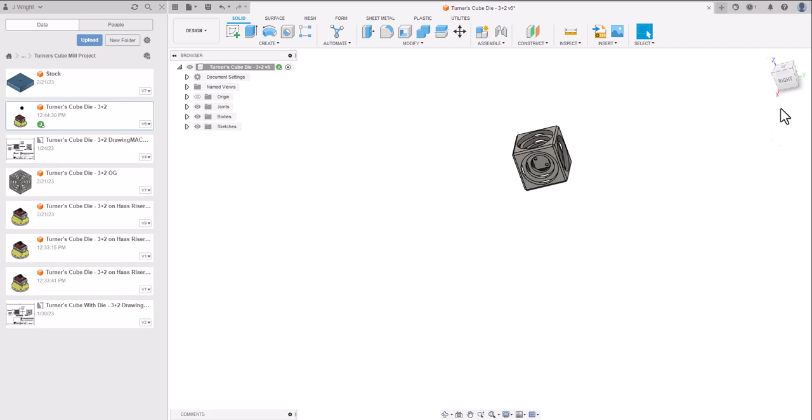All right, so what I want to do is I've got this model already created here, and I want to machine it on a multi-axis, something like a UMC 750 or 500. I'm going to go ahead and rotate this up to the top so that I've got my top up, I'll just go a long way around to get it.

I'm going to set, you can see over here I've got a piece of stock, that's really just the extra stock. I'm going to start with a piece of 2 inch by 2 inch square stock, and make it a little bit longer, that way I've got something to grip into in the vise. The way I plan to run this, put it in the vise on the riser with the additional stock underneath it, face mill off the top of it. I'll give you a couple of options of either face milling all 5 sides of it or milling around the outside of it, doing a couple different things like that.

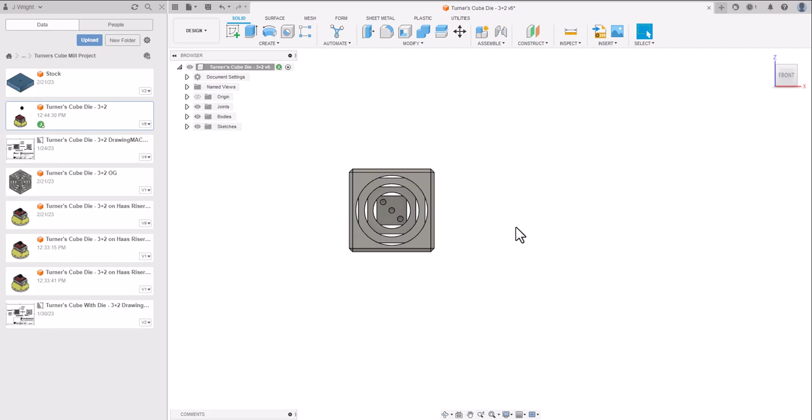But we need to get this additional stock put on the bottom of our part. So we're going to take this, skew it just a little bit. We've got this stock, all this is, I'll drag it in here and you can see it a little bit better maybe.

It actually says stock to be removed. I'm going to move it down. It is just a piece 1.85 by 1.85, that's the small side of this. This would be just this bottom area here, it's 3/8 of an inch long, and I just want to attach it to the bottom of our part.

So I'm going to take it and I will go from the center of it, and I went ahead and put a little point right in the middle of the part, just so it's a little bit easier to find its home.

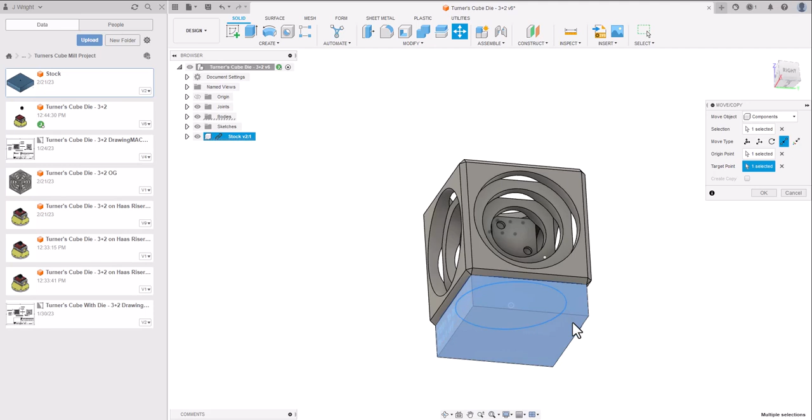And now it's attached to the bottom, and at this point it's good to go. It's got just this piece here, and again this blue piece is all going to be removed after the fact. So at this point I've got my part that I'm going to be machining, then I've got my smaller piece that's going to be removed later on.

I'm going to go ahead and do a file save on this, and actually I'm going to rename it just so I don't mess up some of my other stuff that's out there. I'm going to call it 3+2 video one. I'll save that. So I still need to go ahead and get it put on the riser, so I'll do that next.

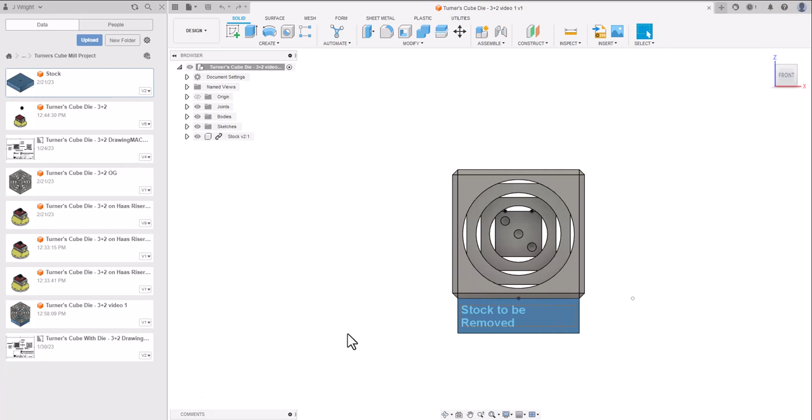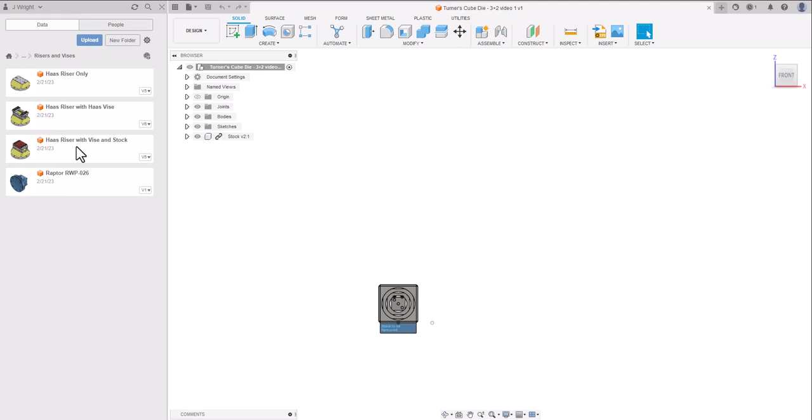So let's see, got that saved, I'll bring in my riser. This is just going to be my riser with the stock but no part on it. So what I'm going to do is I'm going to go back into my 135 folder. I've got a folder I created called risers and vises. I'm going to grab my riser with vise and stock, just going to drag it over here. Give it a second to populate.

Now, I did some work on these before, I'll put these in the modules for you guys. This was an import that I took off of Haas's webpage, and I did a little bit of work to it just to make it a little bit easier to work with. And then I had it in some assemblies, and then I disconnected it from the assemblies, and then I made it one big giant component. So I have played around a little bit with it, and I'll show you how to do that too as we go.

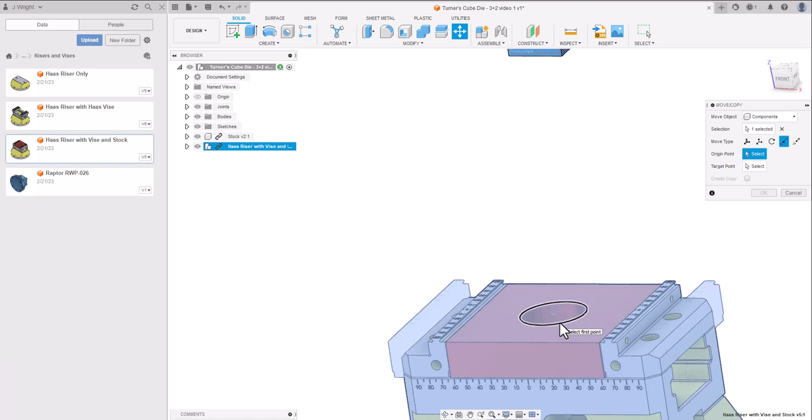So we're going to take this guy here, this selected component, and we're going to go from the center here, if I can get pulled up to it. So from right there, and we're going to go up to the bottom of this blue part right here, and then we'll hit OK.

And we'll get a front view of it again. Pan down a little bit and get out of that.

Now we've got our block in the middle of our part. What I have here is just the vise, and I didn't take the time to move the jaws in so it would actually fit, but I drew just a solid here. It's got a hole in it, and it really simulates some vise jaws that we had from a previous job. At this point, I've really got my part ready to do the things I need to do. I'll go ahead and do a save here, just because I've gotten this far. I don't want to lose what I've got.

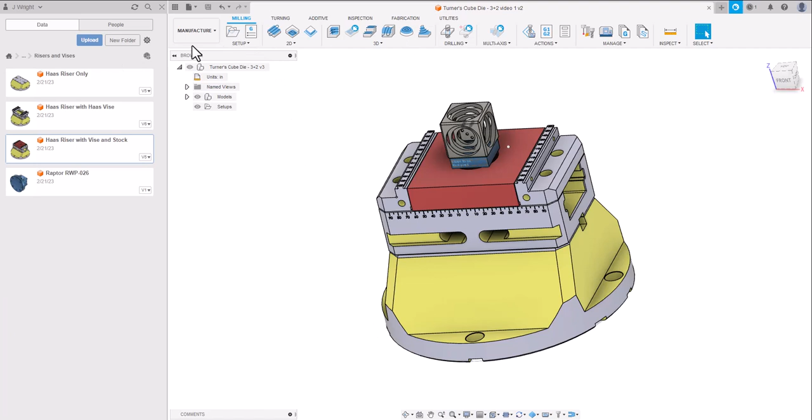So now I'll go ahead and go on into my Manufacture, and I want to work top to bottom, left to right, to get my setup going. Now it immediately sees all of this as one giant unit. That is not what I want to machine.

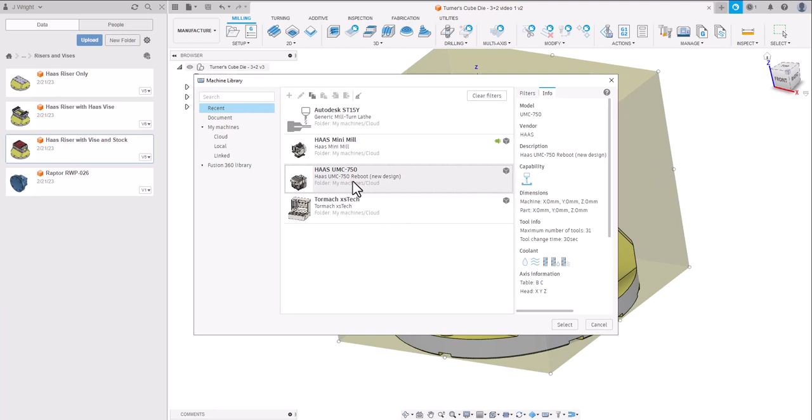So I want to go in and start at the top, select my machine, get all the things that I don't want going on, get those out of the way. I'm going to pick the UMC 750.

Trihedrons up there at the top, that's fine. And then I'm going to set, let's see, let's go back, and we will set either by this model - we can either go from a solid, we can pick my orientation, I can pick how I want things to work through here.

I can also then choose here what is going to be a fixture. Well, all of this underneath here is part of the fixture. So let's see if we can just drag it up. Nope. So we'll just go in and drag, or highlight, all of these components that make up the fixture. Should be everything - I deleted out some of the stuff inside of there. I'm going to go ahead and hit OK on that.

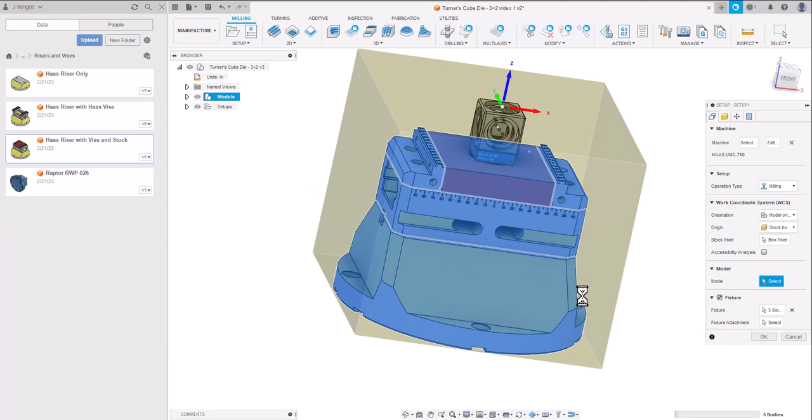I'm going to come back to it in just a second. I want to save what I've got. Okay, so save. I'm going to go back into my setup.

And so now I really want to make sure that this thing knows what it is that I want to machine. All I want to machine is that. Now I didn't choose to show the stock on it - I can if I want to. So there's my part.

I can also do, let's go from a fixed size box, and I can have that box be - I think that stock is 2x2. And it's definitely not that deep. In Z, it's probably 2x2. Let's go 2x2x2.

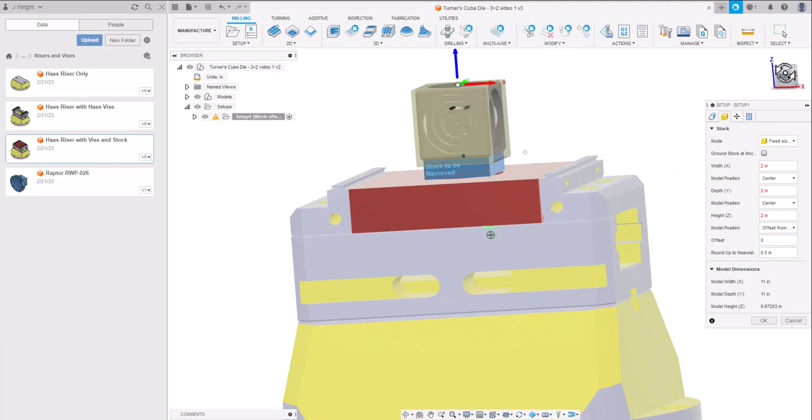And these off the top - no, that's not going to work. Offset of 0, bring it back up to the top there. Probably I better leave a little bit on the top. So probably better give it 75 thousandths offset for the top.

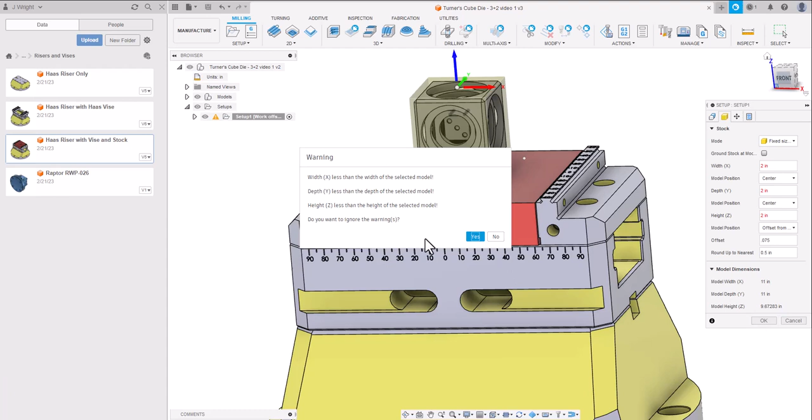Not sure, I've got room in those 2-inch sections. Okay, so I'll leave that alone as of now. That way I've got some stock that I'm actually going to show cutting. I'll probably have to go back and do a little bit of work on that in a bit, but I'll leave it alone for right now. Do a save on it.

And go ahead and shoot to a top view. I'm going to start off with a face mill pass, and skew it up just a little bit. So I want to use a 2-inch shell mill - it's really an insertable shoulder mill.

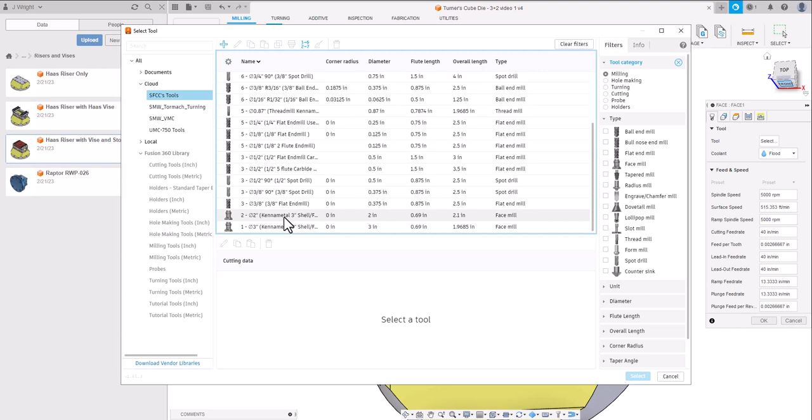So if you don't already have one, go ahead and create one. And if you don't know how to create one, I've pulled one up. I go back into it. You can take an existing tool, or you can go into Fusion and create a tool that's already there. So I'm going to go into this one and edit it, because I see it says 3-inch shell mill here, so I'm going to change it.

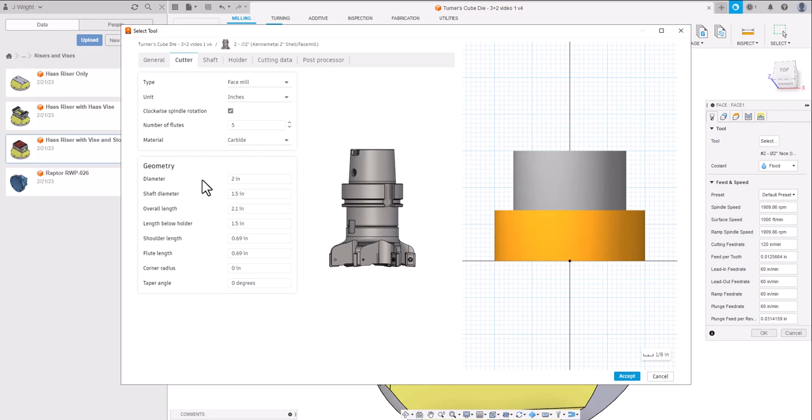It is a Kennametal, but it's a 2-inch, and my suspicion is that the body on it could just be a little bit longer. Let's see if I can get a little bit of holder help.

Maybe not. Okay, this has some projection on it. Probably not going to be really what I want. We'll try it, see what it looks like. Yeah, it's not quite what I want. Let's see, I really need to stay in that Cat 40 style.

Let's see what something like this looks like. Now, those are all going to be kind of oddball holders. But I do need to get a little bit more length on it.

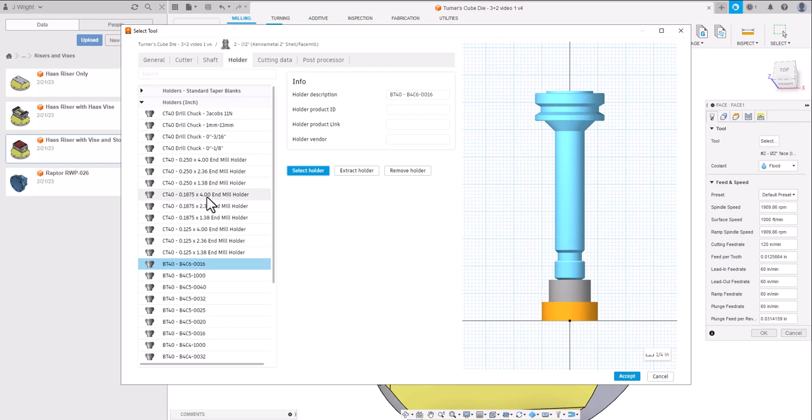That'll give me, let's just say I go with something that's got 4 inches of stretch on it. It's not going to be quite true to form, but it's going to give me a little bit better idea of what I need to have for tool extensions.

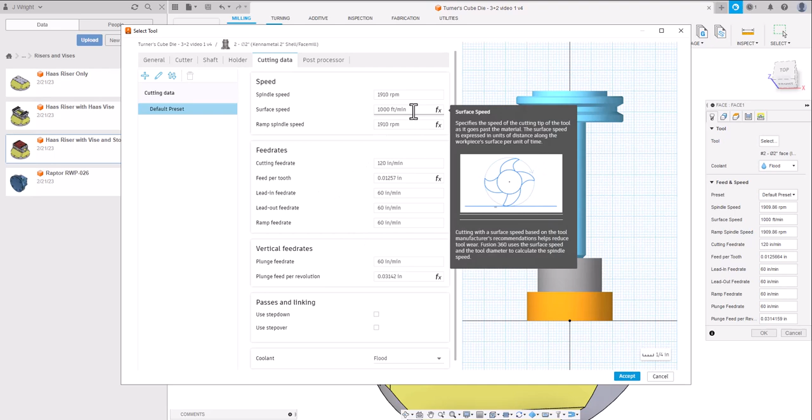I already set this one up earlier with 1,000 surface feet per minute and then feed per tooth, 5 teeth on this cutter, and I've got about a 12 thousandths chip load, so I'm going to be feeding about 120 inches a minute.

It's going to be tool 2 because our probes are set into pot 1. Alright, so I'm going to accept that tool, and we're just going to have to know that it's not an exact true to form tool, but it is something that gives us just a little bit of distance. And depending on how we machine this, it's not really going to make that much difference.

Obviously, this is a really long tool to use. Okay, so let's go ahead and do some machining on it. And that is the surface that I want to cut.

So we'll go right to here, and we're going to do a face mill. Should have chose face mill first. Let me back up here. I don't want that, I do want face.

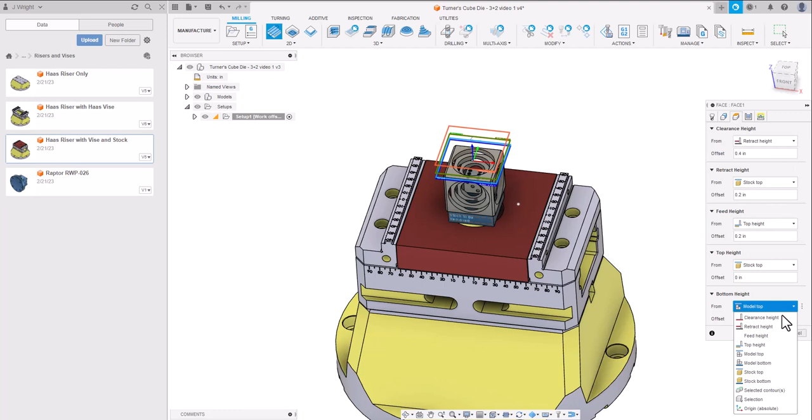And I'm going to select this face. And I really want to make sure that it goes all the way across. Not a huge fan of that radial moving out. There's my face I want to cut.

And I want to go right down through the middle, so I'm going to do a step over of 2 inches. Pass direction probably doesn't matter much here, and probably don't need to worry about stock to leave. I can change my vertical lead in and lead out if I want to. I'll leave it alone for right now, and we'll see what it looks like.

So it just barely comes off of it. And it's okay as long as everything is awesome. And we'll change our pass extension to be about 1 inch, 250 thousandths. We'll leave the radial up and down on it, but it'll extend out just a little bit more on that.

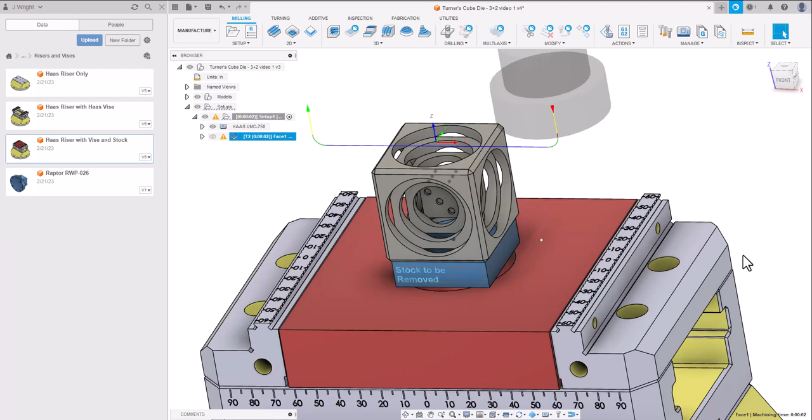So as of now, I'll go ahead and do just a simulation on it. And I think since I have Camtasia going, and Fusion, that's why I'm having so many problems with running this thing through here. So it may be a little jerky as it goes through.

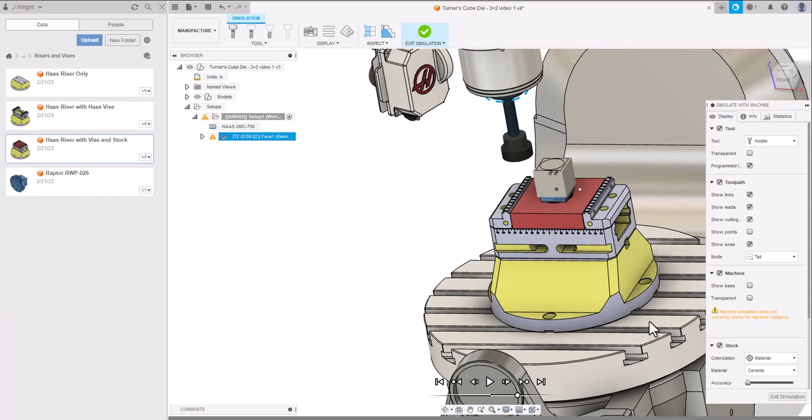All right, that's not bad. So by having the machine base turned off, it's only going to show me really what matters at this point. So I can exit the simulation, go back, straighten things back up again, get everything kind of back into view. I can get rid of this waffle section because it's not really necessary for me anymore.

I don't think I'll be needing it. I hope to not need it. All right, go ahead and do a file save.

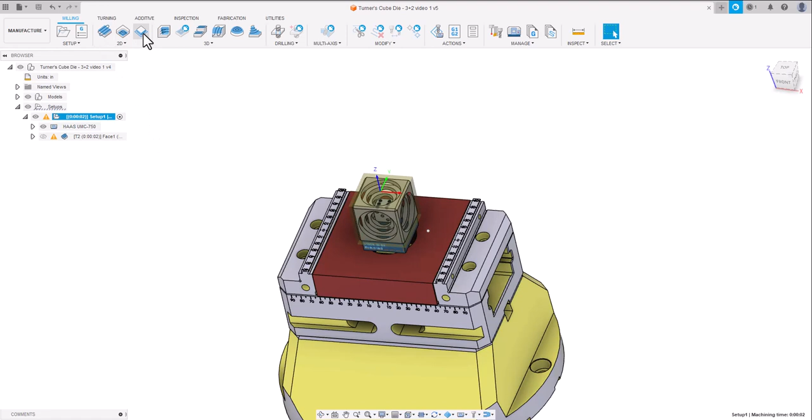Then at this point, I'm going to give you a couple of different options here. Probably the easiest way to do this thing now is to do a 2D contour and to change tools.

And we can go to one of our better end mills. I think I've got some newer 3/4 inch carbide 3 flutes, and then I've got some 1/2 inch 5 flutes. So we'll try maybe a 1/2 inch 5 flute on the outside of this.

And it's already set up for tool 3, and I believe it's already set up for, let's see, it's got a pretty high RPM. Let's go in and do some editing on that. That's gonna be pretty crazy. 42,000 is going to be a little high.

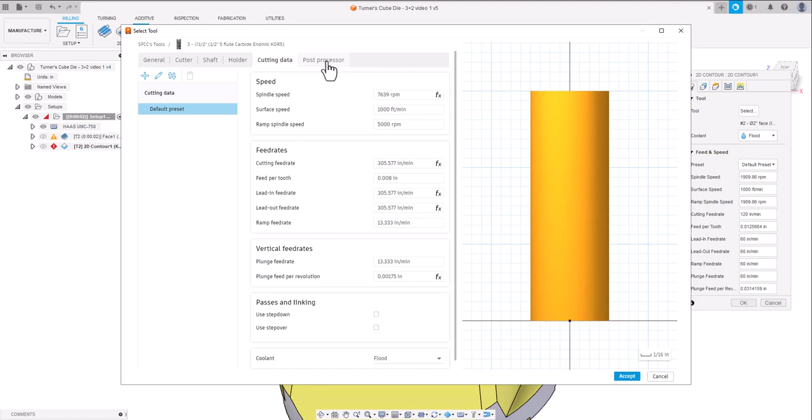So if we move our surface footage to 1,000, that puts it a little over 7,500 RPM. I think I'll probably go down to about 8 thousandths on that. That puts my cutting feed at 300 inches per minute. Remember, it's a 5 flute, so it's a little bit bigger, I mean a little more flutes on there. So that's tool 3, diameter offset 3.

Okay, let's go back, I didn't do anything with the holder on it. I want to try to stay as true as I can with these end mills and how they look, because if you start to get the idea in your head of 'I know what it looks like,' that's great for you, but the next person who comes up after you is going to run the part.

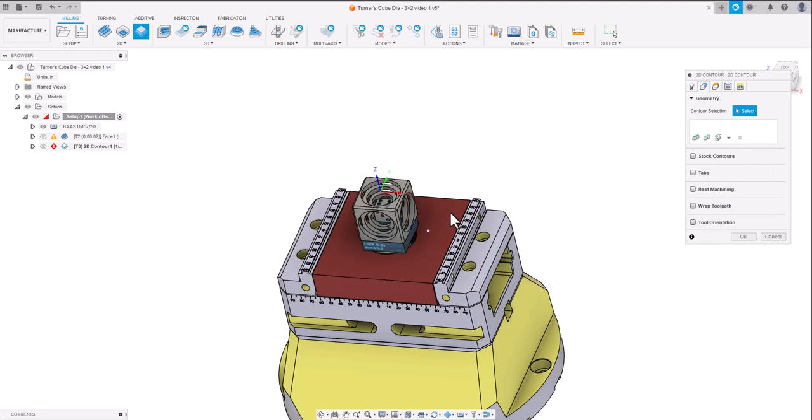And it could be really potentially hazardous for them, because they're not going to know all the things that you've just remembered along the way. So by putting in the correct information, you're guaranteed to be able to simulate it and see all your potential errors that you may miss along the way.

Okay, so on this one I'm going to do just a contour. I'm going to do a chain around the outside of it, and go to this outside edge and hit OK. Now that outside edge is not the bottom of the part, see, it's right up there.

So what I'm going to do is go to selection, and I'm going to give it another 100 thousandths as it goes around that.

Let's see, those things look pretty good. I'm not concerned about tool orientation at this time. I could go ahead and machine this to size or leave a little bit of stock. On this part, we're really not that concerned about size. I mean, I care about size, but what I care about right now is you getting the idea of how all of these things are working together.

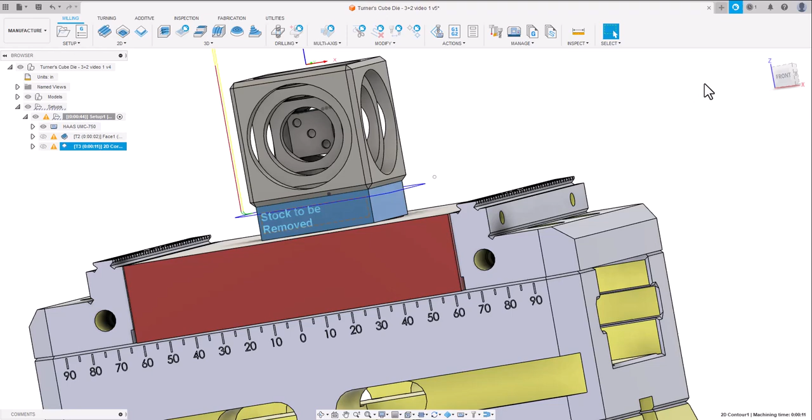I think I'd be willing to take a shot at what that looks like right now. So one pass around it probably wouldn't hurt, to do 2 passes around it.

So what I'm going to do is just duplicate this, and then on the first one go back in and edit it, leave a little bit of stock on it. I'll leave 10 thousandths radially. Axially doesn't really make much difference.

So now I've got a rough pass and a finish pass basically going around it, leaving a small amount of stock. At this point, Fusion's telling me I got slow performance. I can definitely tell that. So let's go ahead and do a simulation on it.

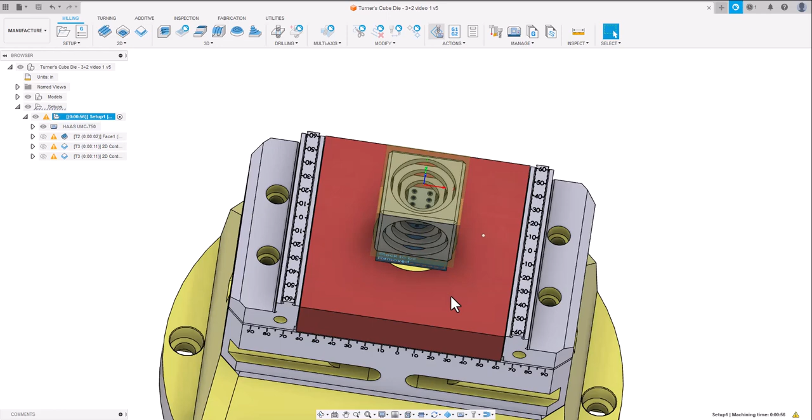You know, I always say that I don't like to do this in the classroom with the camera because it's so much harder to see. But man, it does run faster this way.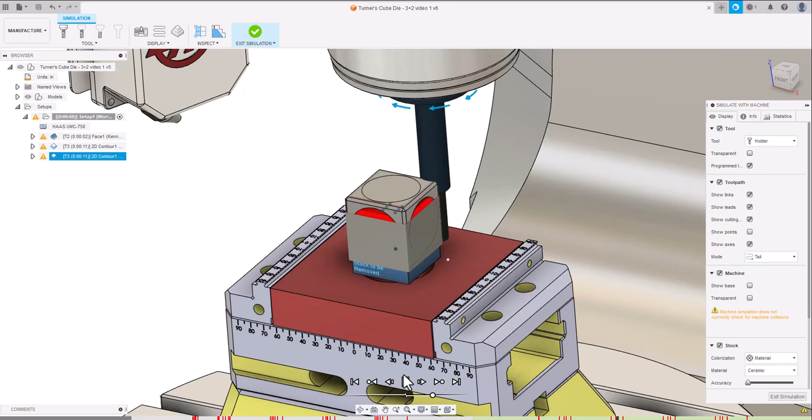Alright, so face mill pass across it. I'm going to go 1 pass around it, and then another finish pass around it. That is not going to work with the way that we've got it right there, so we need to go back and edit that tool.

Flute length on it needs to be a little bit longer.

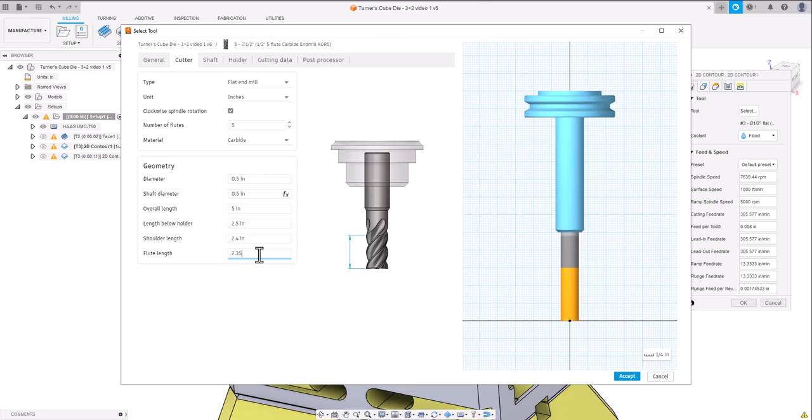Let's say the overall length is 5, and then below the holder, let's say we've got 2.5, and then let's say we've got 2.4, and then I think I have 2.35 for that, for the flute length itself. Alright, let's try that.

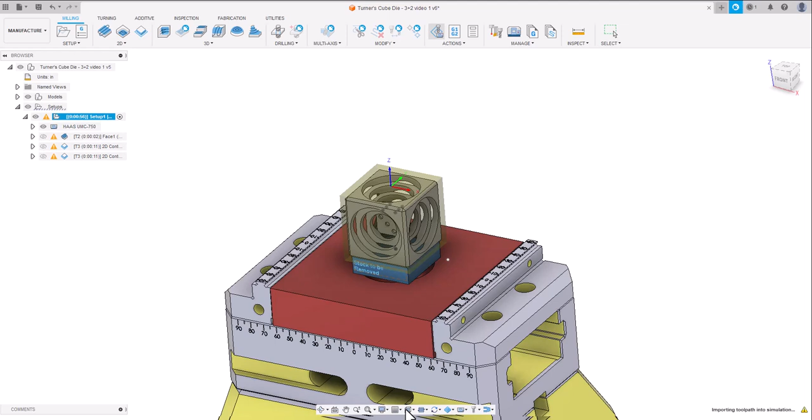Okay. I'm going to do a Control G and regenerate all of my operations, even though they don't all need to be done, and run a quick simulation over it. Okay, good.

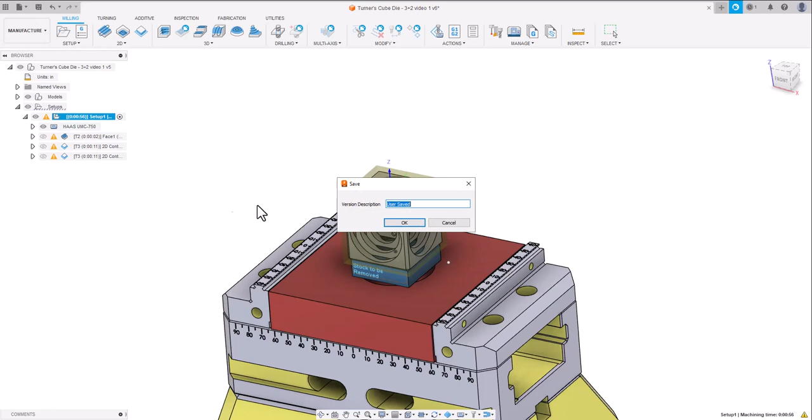Okay, so let's move some stuff out of the way here. We've got the face faced off. We went around the outside, rough it and finish it. Now let's start working through some of these bores here.

So we'll go down and we'll do pocket clearing. For right now, I've got a 1/2 inch 5 flute end mill. I'm probably going to end up changing that end mill as we go. The one I originally picked out for this one is one of our KOR5s, but they don't do a really great job of helical milling down. I've got some other 1/2 inch and 3/4 inch that might be a little bit better for this particular setup, but we'll start with this for right now.

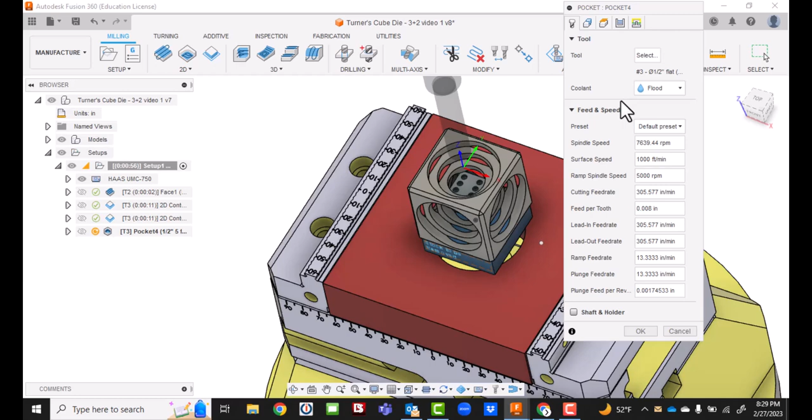So keeping those same parameters of the tool as before, we're going to go in and select the things we want to machine out. So we'll hit selection - I want to do this bore, this bore, and this bore. I want to hit the top of it just to make sure I'm getting the top of it, that's where I want to start at. From there on out, I want to leave about 10 thousandths in each direction rather than 20.

And my maximum roughing step of 50. I almost wonder if I should make that just a little bit smaller, just in case one of those KOR5s accidentally gets chosen as we're running through.

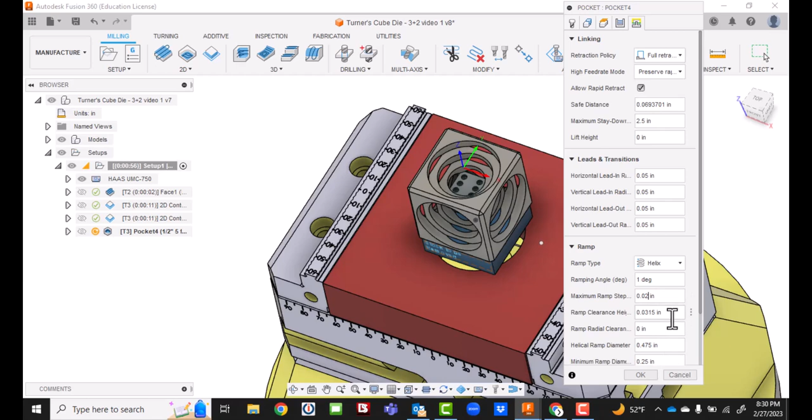Let's do a helical angle of 1 degree, maximum ramp step down of 20 thousandths. I know this makes it really pretty shallow, but we'll give it a shot and see what it looks like.

Okay, it is a lot of cuts. It does take 3 to 3.5 minutes to do this, and this isn't a perfect world, so we're probably gonna have a little bit more time added to it. Let's run through graphics and see what that looks like.

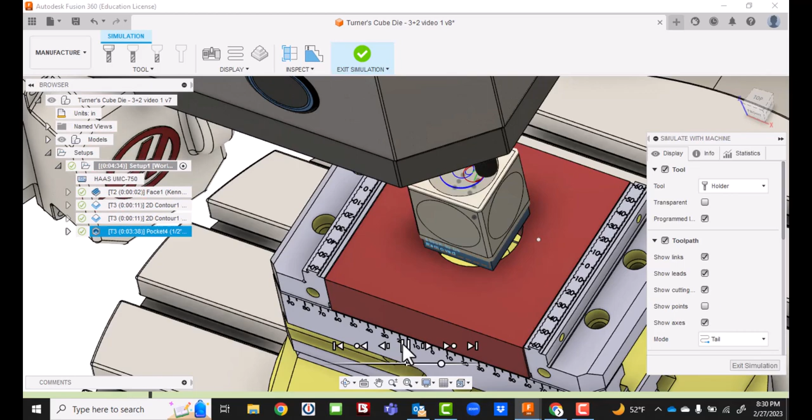Now we are leaving 10 thousandths stock, radial and axially, so we will need to come in and do some finish cuts on it. But we want to get all 3 pockets roughed out.

Okay, and so from this point we can see what we've got, and looks like it'll be about where we want it to be. Let's take a look down here if we can see. Looks like it's getting everywhere where we want. All right, exit out of that. Do a little flipping around, get us back into place.

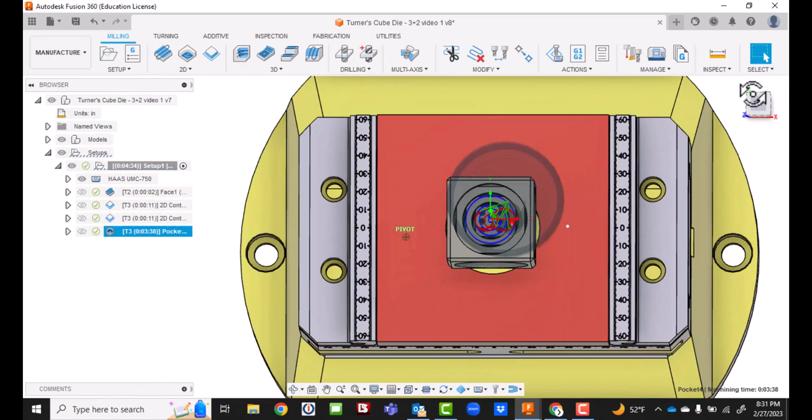Okay, I'm gonna go ahead and save.

And now let's see, we can go ahead and start roughing out some of our sides. Continue to use this pocket setup. Let's flip it over here and we'll grab this side.

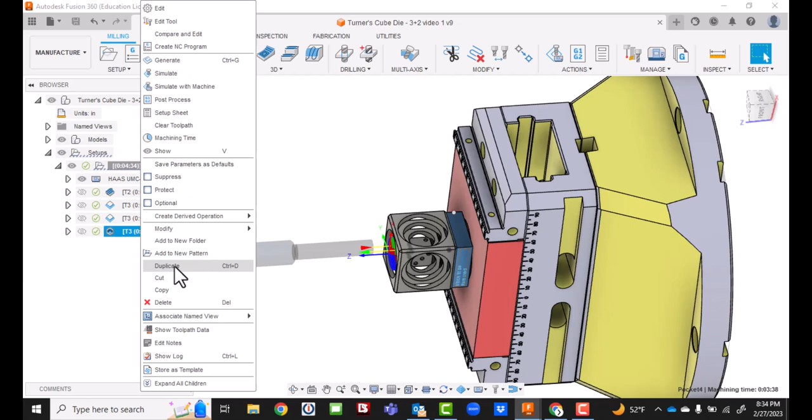So I'm thinking about this side first. And so really what I can do, I think I could probably just duplicate this and then go into it. I don't really know how much help this, or how much time savings you actually get by doing this, but...

We'll get rid of these chains, and then we'll select a new, this one - oops, standby. Let me get some things back in order here.

Let's go to orientation, and let's do X and Z. Z is going to be this face, X is going to be this line, and to make sure that's still in the middle of the part. Yep, this looks good. Now we'll go over to selection for...

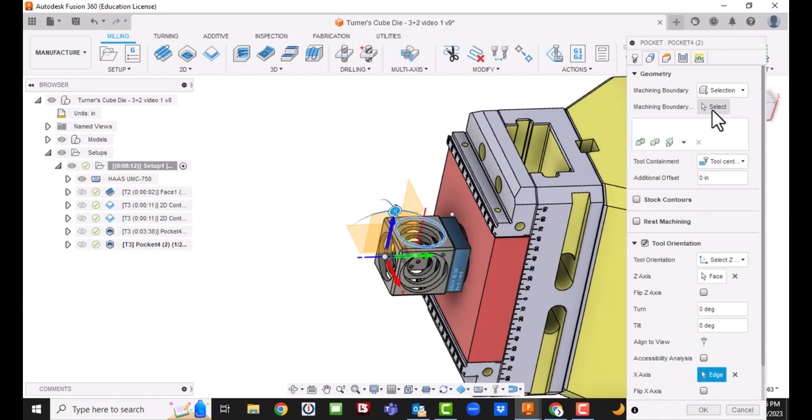Let's see, it's still - I'm gonna get out of this for just a second. Come back into it. There's my pockets. Let's go back over those. I don't know that I quite trust that.

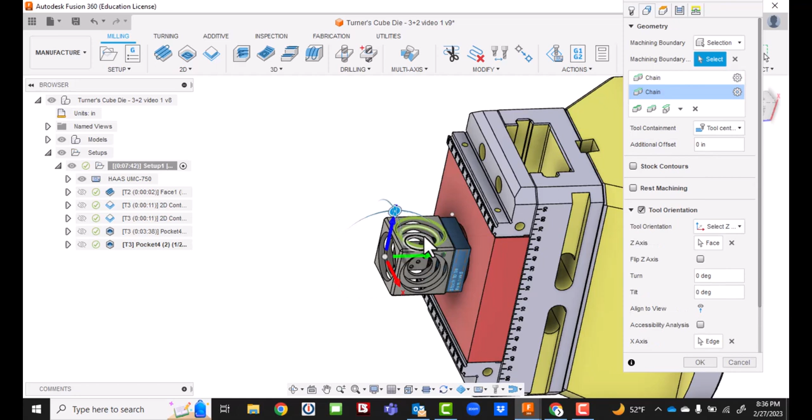That one, that one, and that one. And let's check and make sure that everything else looks good. Face selected, 0 and 0. Okay, go ahead and save that.

At this point, it may not be a bad idea to go ahead and start marking out or labeling what it is that we're doing, just so we can keep track of the pockets that we're doing.

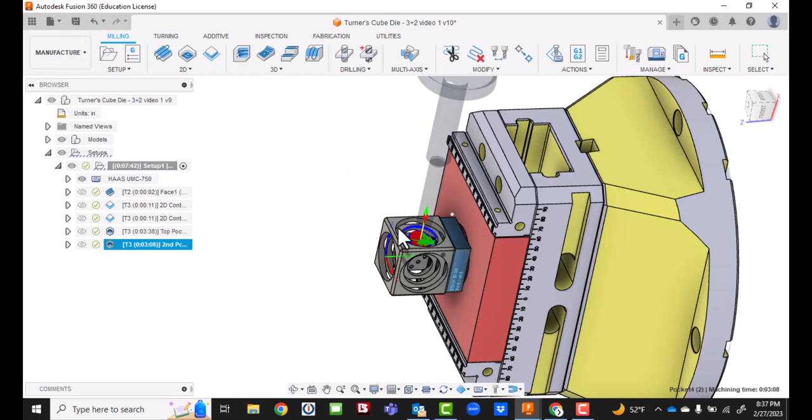So we've got that pocket there. We're just going to keep rotating around as we go. Okay, so I've got this one, got my top one done, I've got my side one done.

I'm going to go ahead and begin to create a pattern for this machining, and so I can kind of do it two different ways. Go ahead and just add a new pattern, and we'll get it started. We're really just going to duplicate is what we're doing.

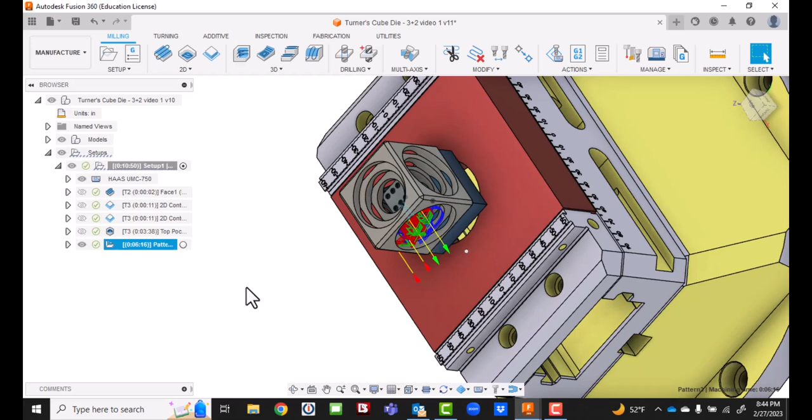And what we're doing is we're going to package this all up. So this is our second pocket, and we're just going to duplicate it one more time around it. And so the advantage in doing this here is we've got this one thing that moves all together around it, so they'll all kind of function together as one.

Right now they're all on one side. We're going to just reassociate these patterns to our new faces.

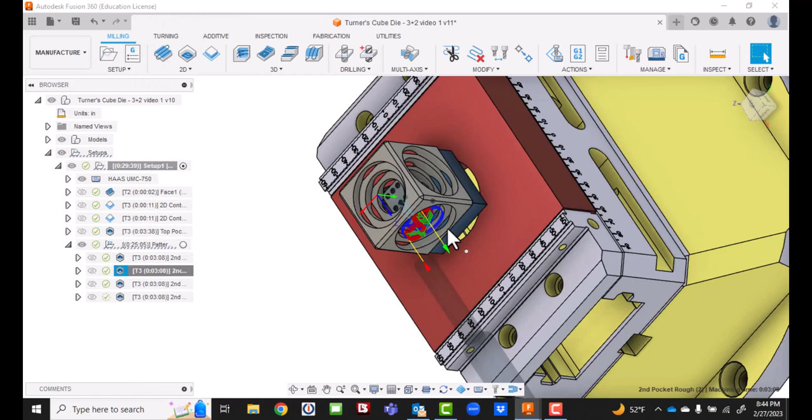And so we'll hit tool orientation, and we just need to hit the Z face right there, and then was I in Z and X? Get down there so I can see it, and I'll pick the edge of that face.

And I'll need to come back and reassociate those chains.

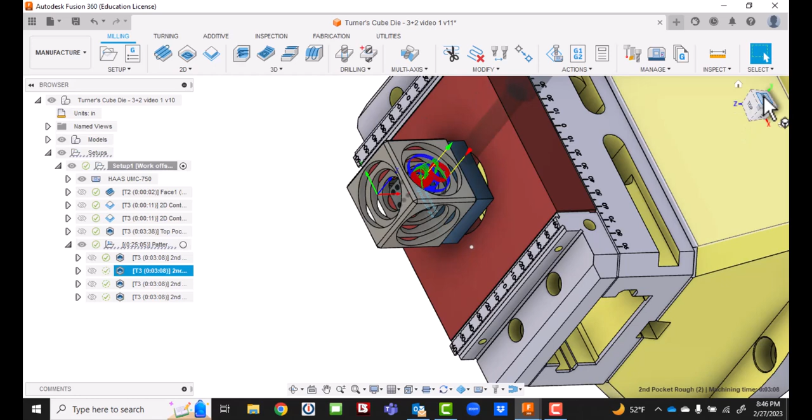That's really pocket 3. So we'll go ahead and name it pocket rough, I think. Now we're going to go to the next pocket.

We'll open it up, go back and change our orientation, Z face, go down here, grab X, and then we'll come back up here.

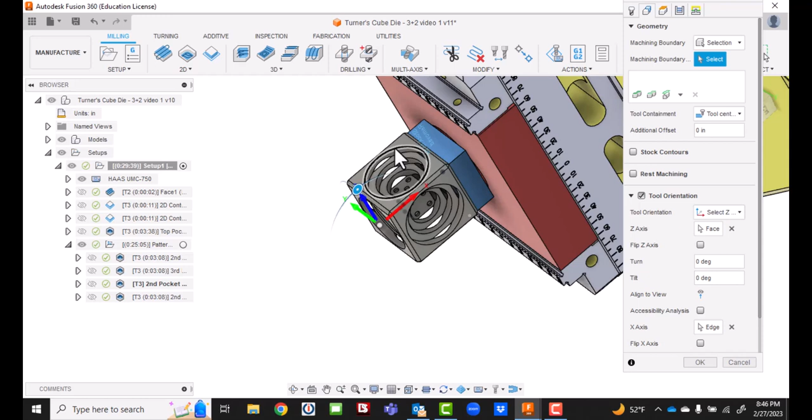We'll grab 1, 2, 3. That gives us the 4th pocket rough.

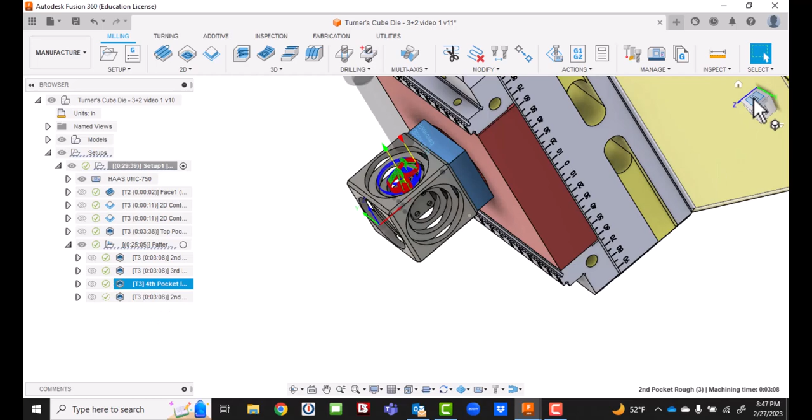And now we should, let's see, what do we got? One, 2, 3. We just need to grab this last one, right? So we got 1, this is our top pocket, 2nd pocket, 3rd pocket, 4th pocket we just did. 5th pocket is what we need to do.

And it's going to be on this side. Select our Z face, select our X edge, and let's grab our contours.

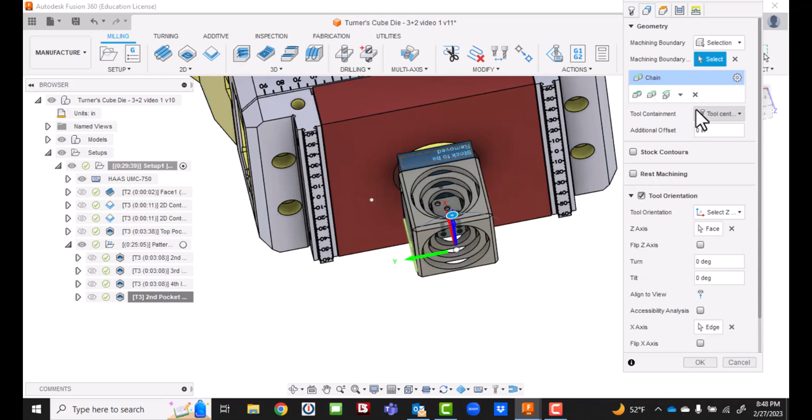Okay, so let's go ahead and take a look at it. I'm going to do a quick save and fit, and we'll bring it up to the top to do simulation, just to remind ourselves of the stuff we've been doing.

So we've rotated. This would be pocket 3. Pocket 4. Pocket 5 - that pocket needs to be renamed.

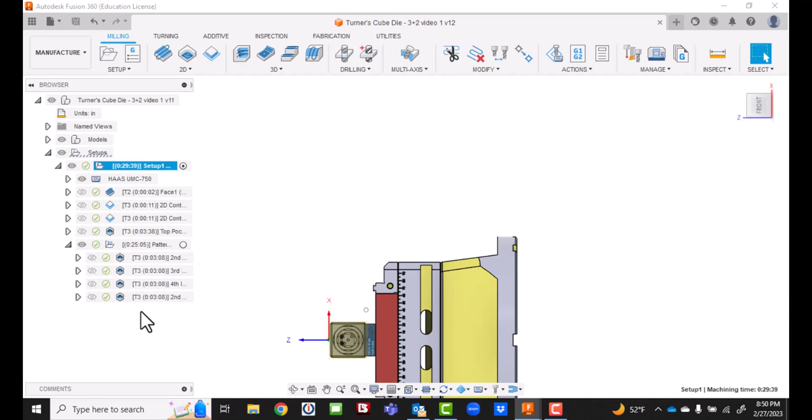Okay, I ended up having to remove my pocket or my pattern. I had a little problem with it duplicating. So I just pulled it out, and the downside is now these are all just individual components rather than being grouped together, but they'll still work for what we got.

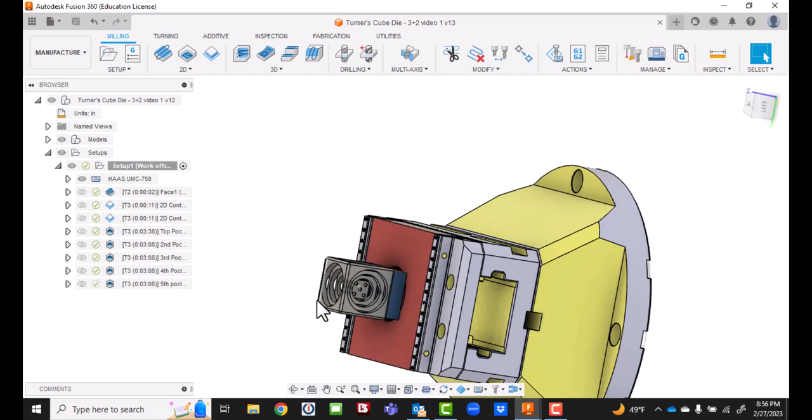Okay, so that's our roughing for the entire part. And so we've taken and finished our top. We roughed and finished around the outside of it. We've roughed our pockets. So now we can go in and maybe chamfer all of the faces on it.

That does get a little tricky in a couple of small areas, such as this section right here. We're going to give it a shot and see what it looks like. I will at least do a couple of the sides, and then you can do the rest of them, and then we'll go in and finish

one of these pocket faces. We'll do these 3 bores on one of these sides. Then drilling, I'll do one face, and then you can finish up the rest of them on your own.

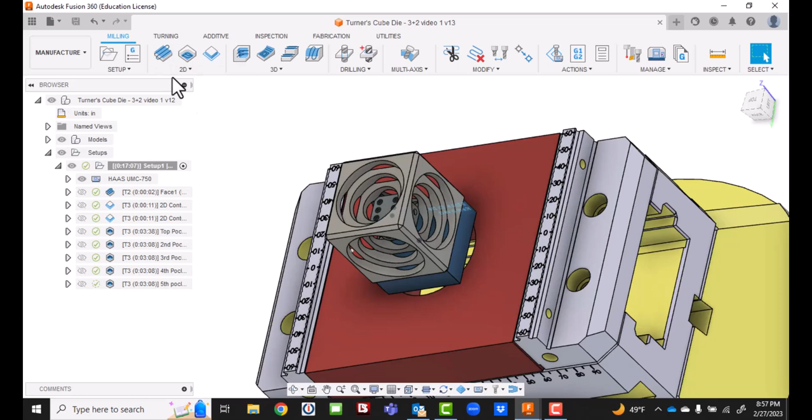So let's go ahead and do. Let's see if we can get away with calling this a face. And I'm going to go in and do my tool orientation and set it up for, on this one's going to have to be Z and Y.

So this is my Z face. This is my Y edge. Oh, come on, pull down. There we go. So I'm going to go my Z face, my Y edge.

And so if you put it here, kind of flip it over a little bit, you can see it, maybe a little bit better, maybe not. And then what we're going to do is we'll just go down and select here. We're going to select face contour. We're going to contour that face.

And I don't know that it really matters how we do that. It should be one single face across there. Okay, select that face. And no selection.

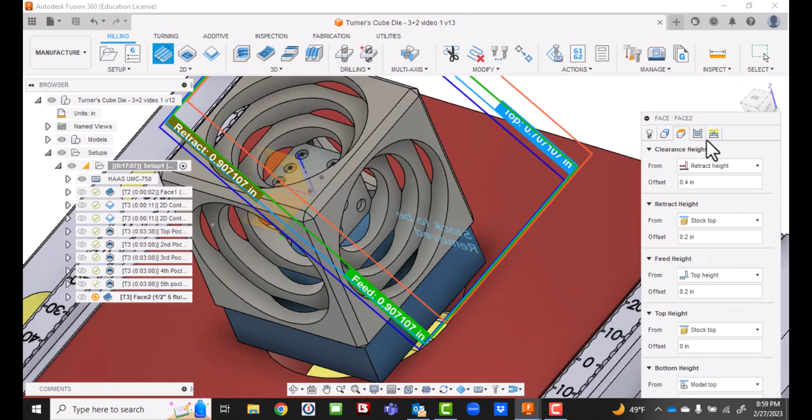Okay, there's our face. Same tool. Let's go ahead and, just to be on the safe side, we'll go to bottom height. We'll hit selection at being on this face. No offset.

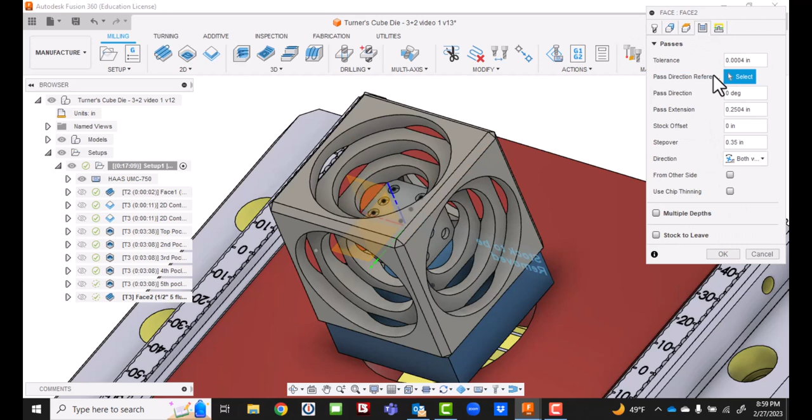Okay, so that works. It just doesn't, it's just not what we want. So let's go back into it and let's just change our pass direction, and we'll go 90 degrees from that.

Our pass extension, everything else looked good. So now we've got that face there. Okay, so we'll save it.

Let's do this little bitty face over here. Try and drag it down so we can see it. Okay, so the face that I want to get is this one. Try to put it into a position that fits better for viewing.

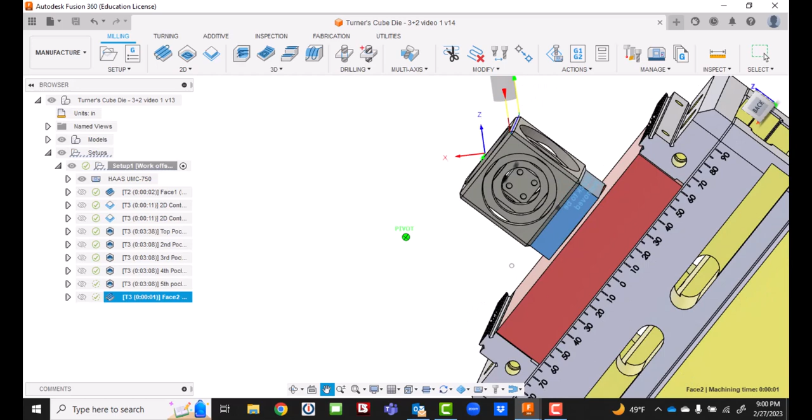Oh, something about like that. Bring this thing around, bring it over a little bit like this.

Okay, so I don't have a Y face anymore, or a Y edge anymore, but now I do have an X. So let's go ahead and see if we can't get it. And we'll go tool orientation, and we'll go X and Z. So this is our Z face, and then this will be our X edge. And we're going to face this section,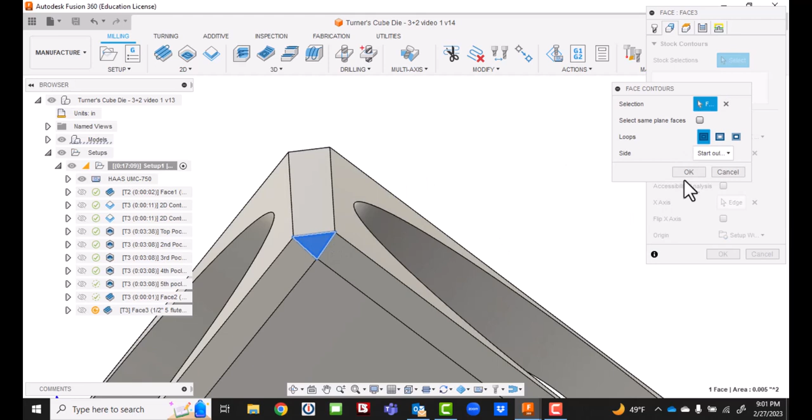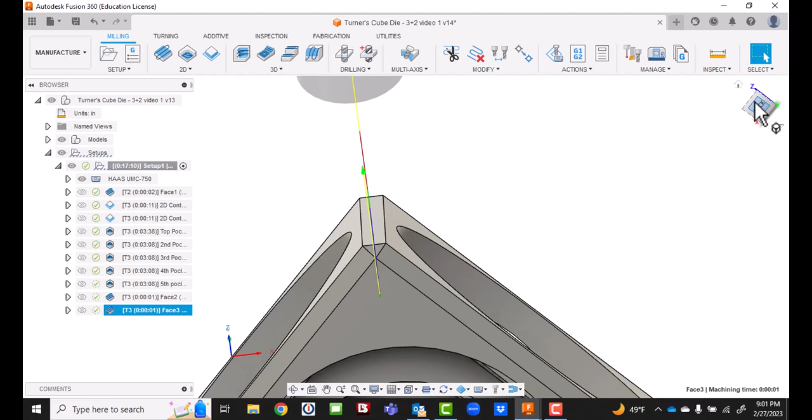and let's see what it looks like. I think I'll change my direction. Really, direction on this doesn't make a whole lot of difference, more personal preference. But I want to try and stay away from going into areas that have potential problems.

So here I've got this face. Now, on this part, since we went around the outside of it with the end mill, if you want to index around and face mill all those faces rather than end mill, you sure can.

So all of these faces are done. Go ahead and whip around it, doing large face, large face, large face, large face, and then short face. Same thing for all of those, okay?

Now let's go ahead and do one of the faces for the finishing. So typically on something like this, I'm just going to go in and do a 2D contour. I'll probably do this, get my orientation right. X and Z, this is my Z face, this will be my X. And then, yep, that chain still works.

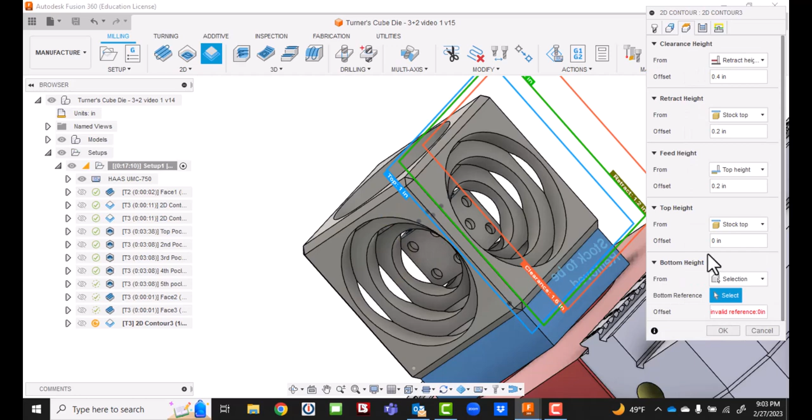I want to select the bottom of it, just so I know where it's going. And then one thing I want to check, make sure that I didn't leave any stock. Stock to leave is not checked, so I'm okay. So that's one finished face.

I can duplicate that around the outside. I can even really duplicate it here. So I got two more of those, so I can duplicate and then one more time. My orientation is set up, I just need to change what I'm actually going to cut. So get rid of the chain, pick a different edge, hit OK, come down.

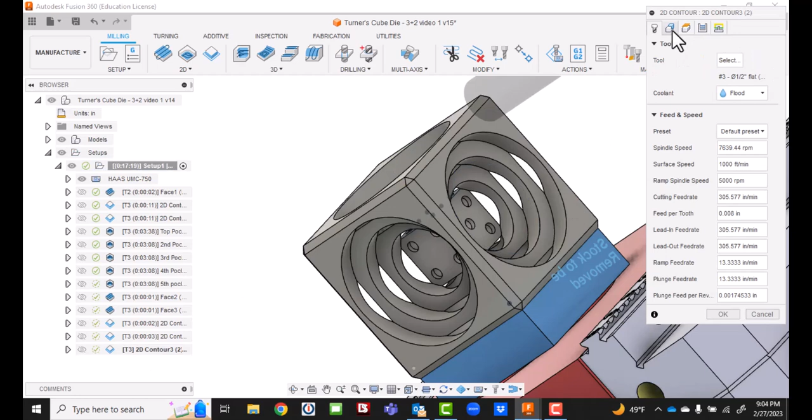Now it's going to be this face that I want to actually cut. That one came out good. Go back in and grab this one. Again, orientation stays the same. Select my chain. And same thing down, select the bottom face of this thing. And okay, so now I've just continue around and do all of those.

Let's switch directions. Let's go here and we'll grab these three. Now on this one, I can't quite remember, I feel like it's 1/8 of an inch, 1/8 of an inch in diameter, yeah. So I'll do a quick save, and then I'm just gonna drill that. It's gotta be pretty skinny down in there.

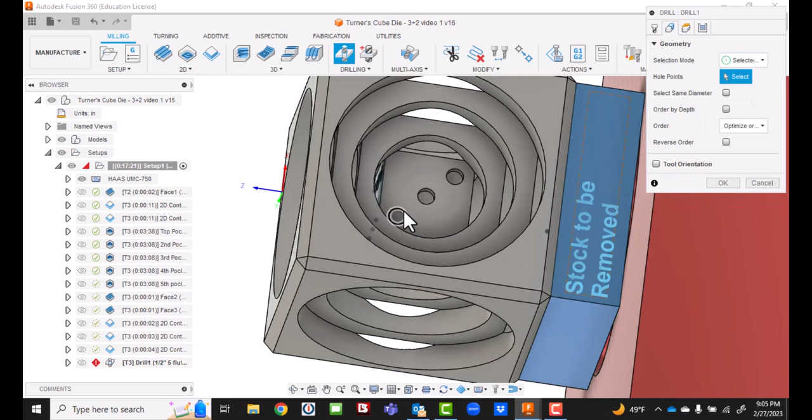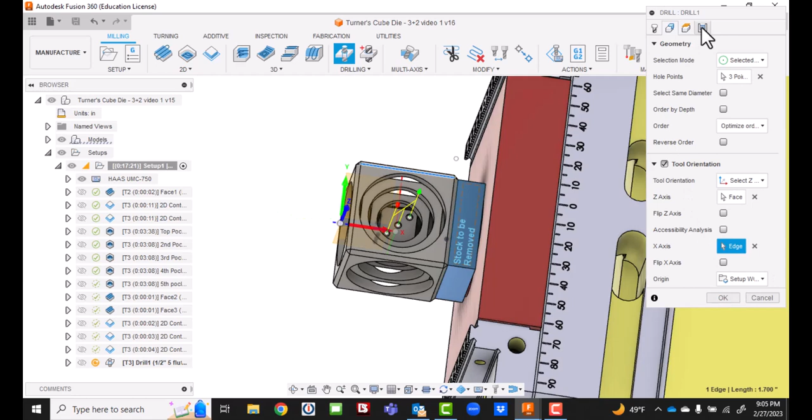I don't know if I can select a point, maybe. Let me get my tool orientation set up. This is my Z face, this is my X edge. We'll grab those three. Let's see, I'm gonna move this over here. It looks like we're going okay in there. Let's go ahead and run it and see.

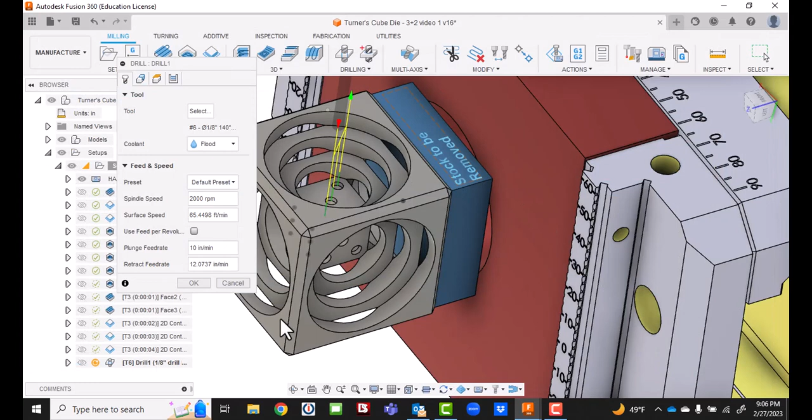Okay, it's doing it. Small problem, wrong tool. Let's go in and grab an 1/8 inch drill. It's tool 6. I probably will not leave it tool 6, but it'll be okay for this one. Its hole top is probably fine, I don't need any kind of peck drilling for it. Whoops. Simulate this.

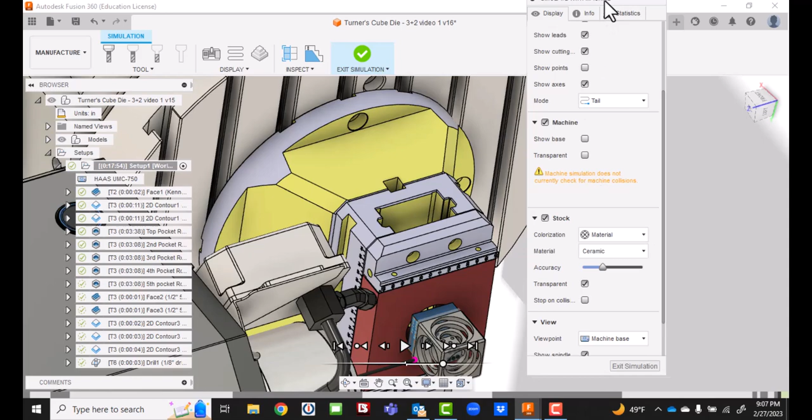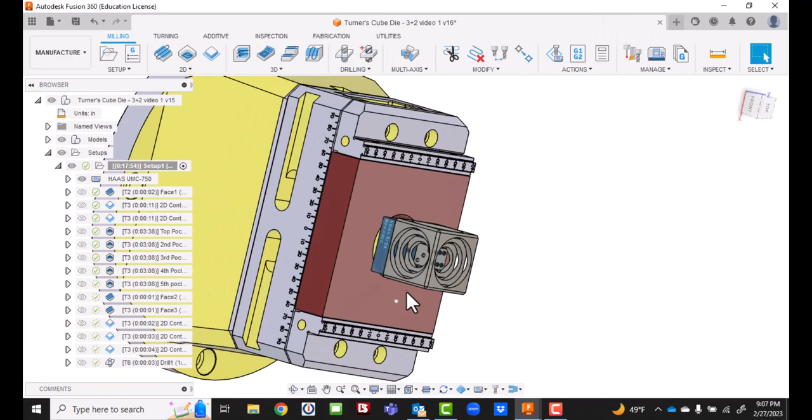At this point, I've got not necessarily a full-blown, full version of the finished part, but I've got enough for you to get up and going. So I'll do a quick simulation through it. We'll call it good.

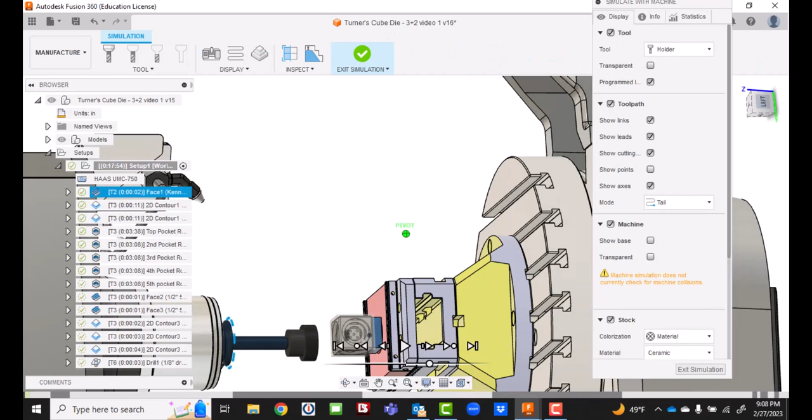That went faster than I expected. Let's back it up and redo that thing. Get this thing orientated back again. Face mill could go a little faster, and really the roughing of the pockets could probably go a little faster. Probably take a look and see what the first one looks like, and then I would encourage you to go back in to the cam side of things and fix it, and then go from there.

Finish pass, pocket, this is the top pocket. Rotate 90. Okay, that I can live with. Save. Okay, and then really at that point, you should be ready to post your program.

And one thing I want you to make sure that you're doing on your configuration, you can turn the chip conveyor on at the beginning, but I want you to think about, do you really want the chip conveyor to run the entire time? So we can do some playing around with that. Preload tool, yes. Optional stop, yes. Use rapids, radius arcs, and let me keep going down here.

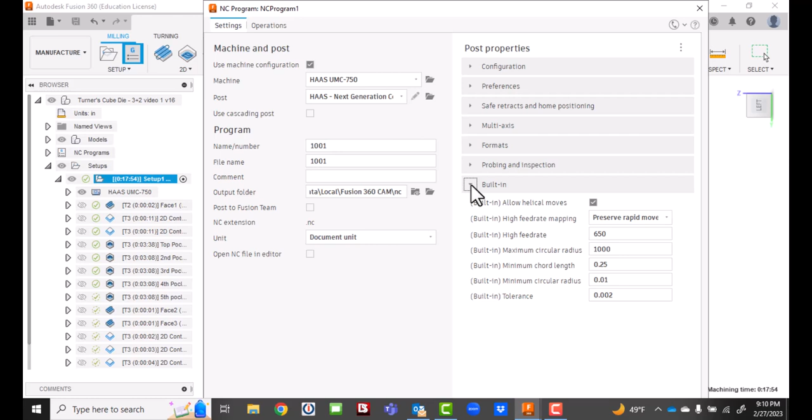I think that I could probably live with what we have here. Remember, keep your program below 9,000 and we will all be happy then.